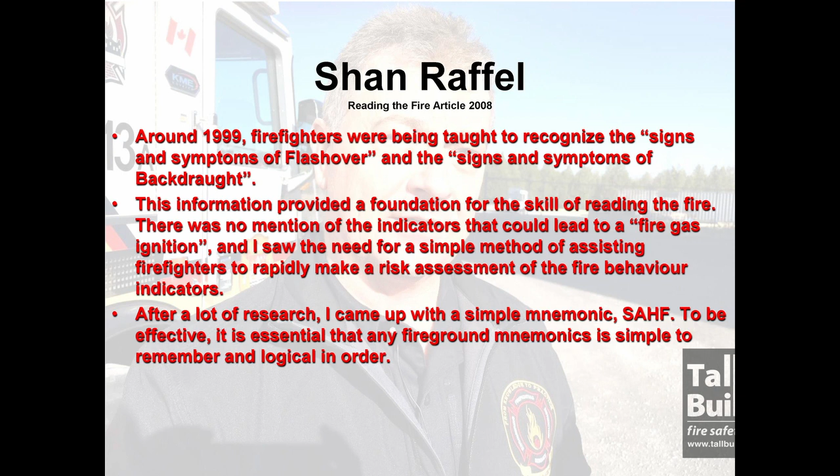Now, the SAHF concept—smoke, air, heat, flame—a guy by the name of Shan Raffel came up with this taxonomy. Smoke, air, heat, and flame. Brilliant idea, great taxonomy. Because historically, the fire service, when you ask them what the signs of flashover are, they would say rolling fire, high heat. Basically there was no taxonomy to the information. They had the information, but there was no taxonomy.

So it made it sometimes difficult to teach or to remember. So Shan came up with this idea, and we've used it and integrated it into what I refer to as the ventilation profile, what we see on the exterior of a building, and it's equated to building and environmental factors. The whole intent is to use this as part of your firefighter size-up and for strategic and tactical decision making. I'm going to review parts of that, not the whole model—there isn't enough time today, but I'll show you where you can get all of it.

The ventilation profile is a term I developed back in 2008. I heard the good doctor here, Reich, speak to the issue of ventilation profile—I disagree with his definition. There's the issue of ventilation, the terms we use: ventilation profile, ventilation state, underventilated. There's a whole bunch of terms associated with ventilation. So we looked at that in this program and said, you know what, this is what ventilation profile means. And that's been adopted by the National Fire Protection Association from our program.

I was on the 1700 technical committee for the guidance for structural firefighting, and that guide is based on science, looking at fire dynamics and trying to bring that into the fire service in a meaningful way.

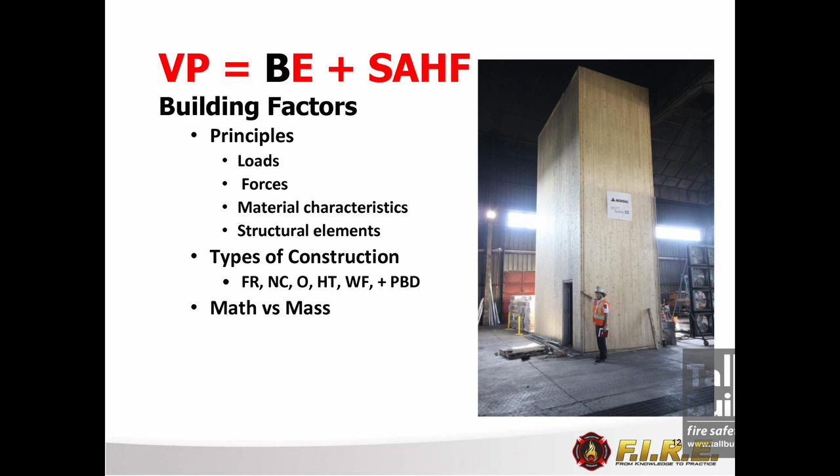That is a wooden elevator shaft being tested in Ottawa at the National Research Council. It could be a stair shaft—we're building wooden high-rises, that kind of stuff. And looking at math versus mass. So we explain those concepts to our firefighters as part of this model.

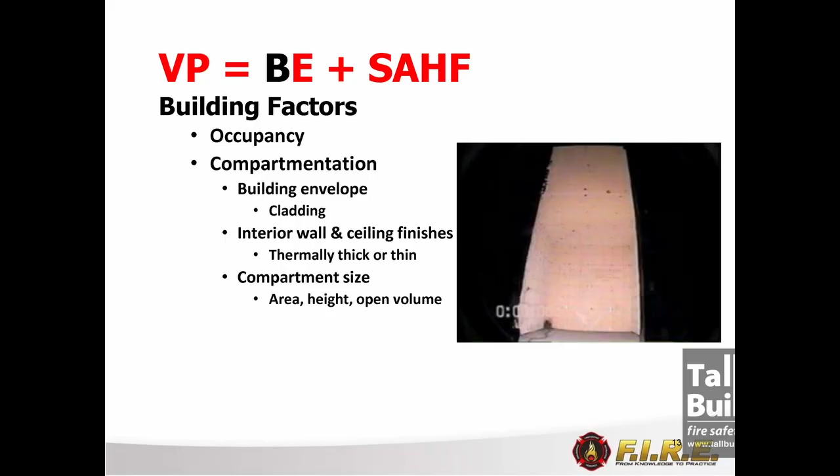So occupancy is also part of these building factors. Compartmentation—not only the cladding of the building envelope, but the interior finishes, as well as the compartment size. These are all important factors to consider when we're evaluating what we're seeing.

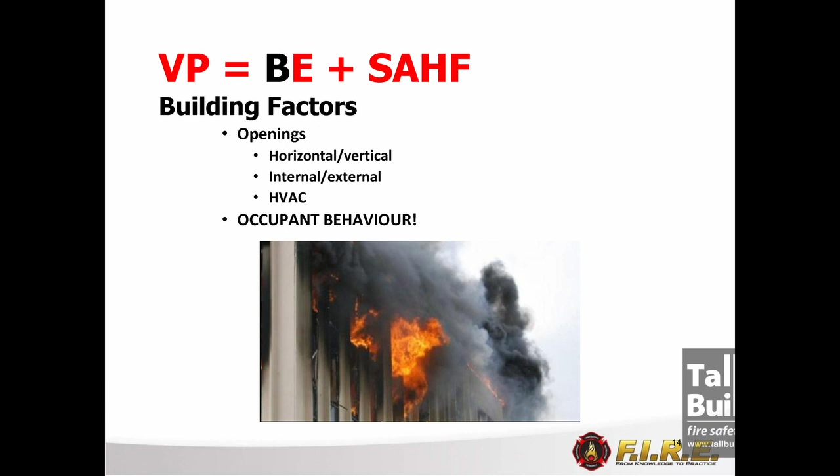Openings—there are a lot of openings in buildings, some designed, some undesigned. And occupant behavior also figures into building factors, like leaving doors open. We've heard from a number of people here speaking to how smoke is let to transit through buildings. It's not uncommon to have buildings universally heated from one source in Canada, the United States, and I'm sure here too, where effectively what happens is it's a nice day but they can't turn the heating down, so they open all the windows. So you have a whole different profile available to feed a fire.

So when we talk about fuels, again, these are building factors—their state. What state are the fuels in within this structure? Flashover is a benchmark.

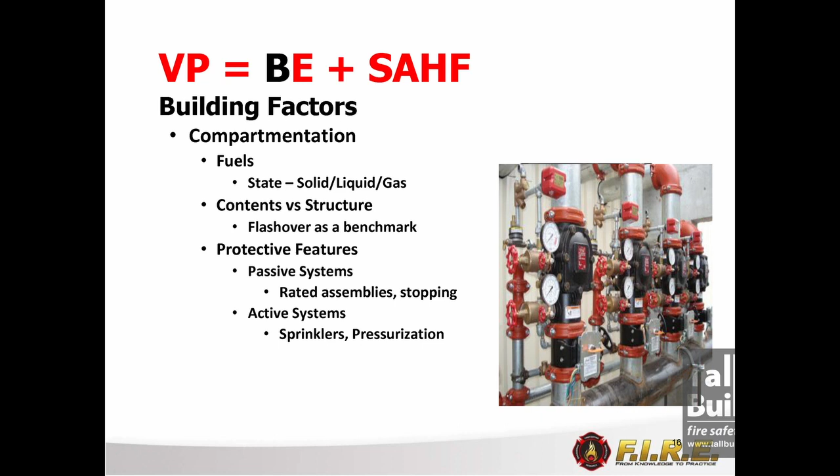Flashover as a benchmark means there's sufficient energy to degrade the protective finishes, which may start attacking the structure. So it goes back to those building factors, evaluating where that structure allows us to fight the fire over time, rated assemblies, compartmentation, and active systems such as sprinklers. These are all elements we evaluate.

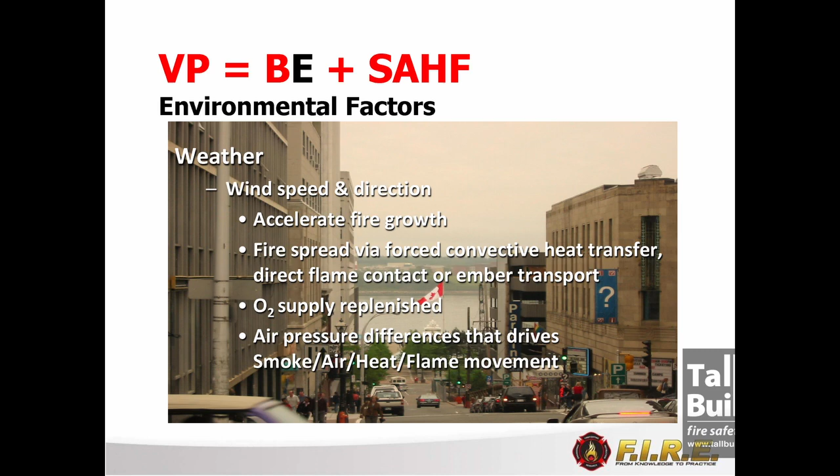Now into the environmental factors, the flag is key to what's going on, but it isn't the only way to evaluate for wind. You can listen at the doorways, see if there's a draft as you're opening buildings. There's a whole bunch of internal and external things you can do to figure out the wind.

Wind speed and direction creates a whole bunch of problems. It accelerates fire growth with unlimited oxygen, and there's forced convection of heat. No firefighter's PPE has ever been tested for convective heat transfer, only radiative heat transfer. So we're not even close to being able to manage this with the PPE we have, and that drives all the smoke, air, heat, and flame.

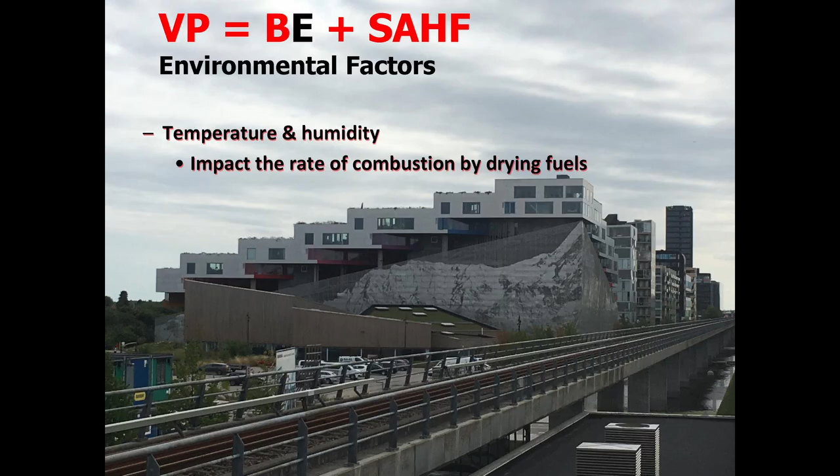Gerard talked about bushfires. Temperature and humidity have a huge impact if we're talking green walls and so on. Normally we'd discuss this in the wildland setting, but we also need to talk about it in the high-rise setting because of these green walls. Imagine this 14-story building in Copenhagen — that issue is real, especially with the wood backing all around it, front and back.

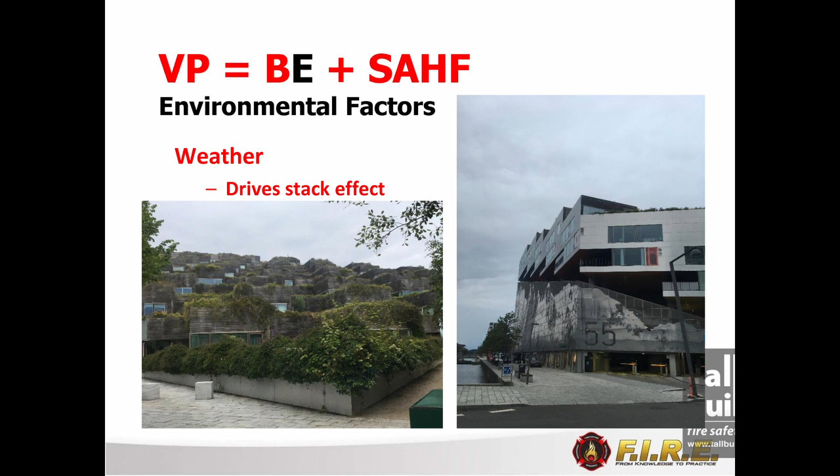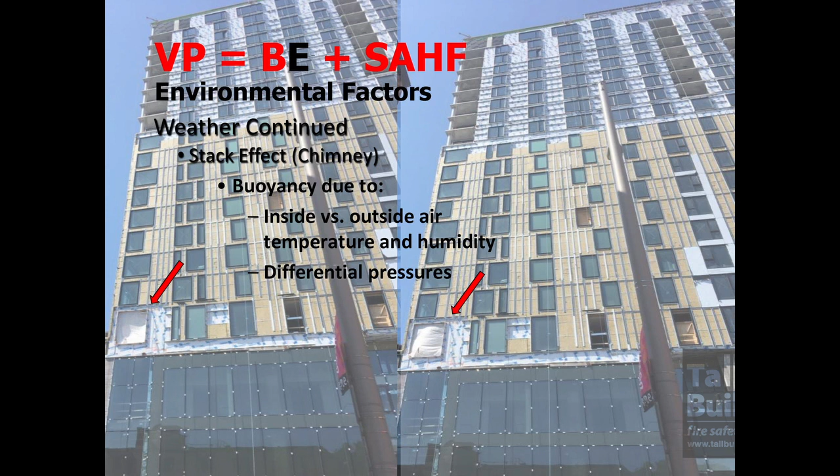That also drives stack effect. So not only are we dealing with the fuel issue on the exterior of the building, we're now dealing with the whole issue of stack, which drives buoyancy and the inside-outside air temperature differential, along with the temperature and humidity we spoke to, and the resulting differential pressures.

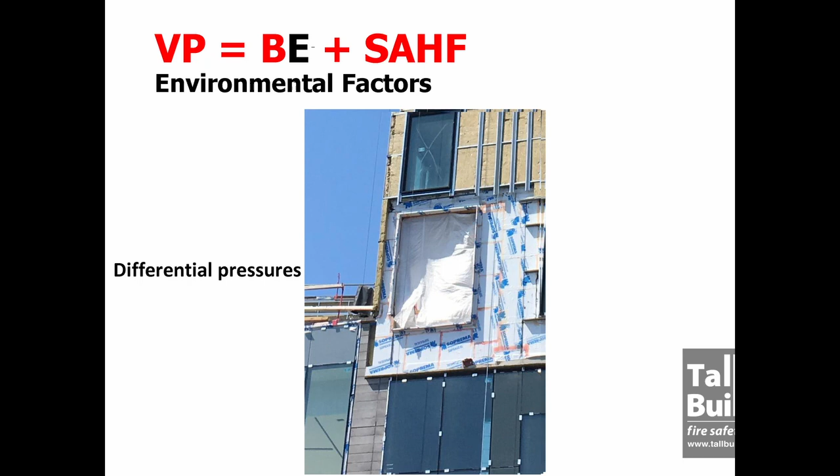You can see in this picture I took just before I got here, a tremendous change in the behavior of airflow within that structure — that chimney effect results in building leakage. That leakage moves through a number of areas within the structure, easily illustrated by a simple diagram. This is something firefighters deal with all the time in residential structures, figuring out where it's going and how it's moving. That becomes much more complex in a high-rise.

So when we look at stack effect, that significant stack effect creates almost the same forces, or better in some cases, as forced convection from wind. And it has led to fatalities.

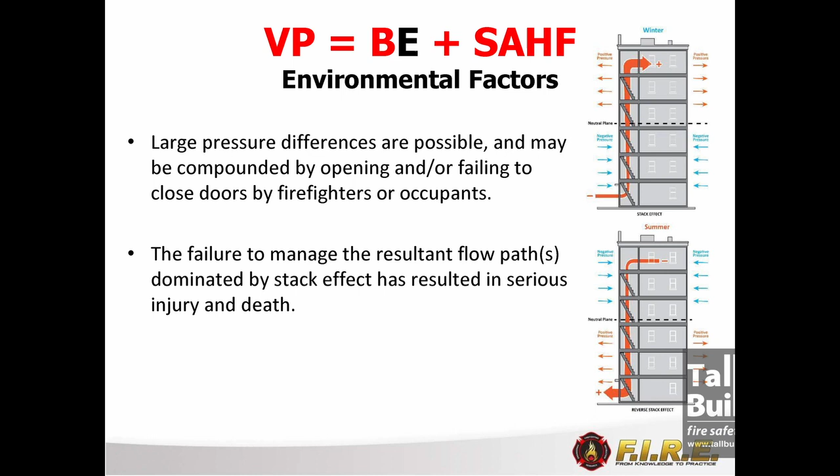We regularly use winter stack effect to our advantage to clear stairwells. Knowing that those large pressure differentials are available to us, serious injury and death have resulted — there are a number of fires throughout the world that resulted from failure to manage that flow path.

Weather in our jurisdiction changes what we see in terms of visible conditions. With less buoyancy, the color of the smoke changes because of the environment — it drops out the heavier particulate, or you may just see water vapor coming up through it.

Essentially the characteristics of what I'm seeing changes, and that's going to be really important when we're looking at the ventilation profile—understanding what impact the environment is having on what you're seeing. An example: a basement one floor below, storage lockers, it's got to travel a significant distance, so what we saw at the opening isn't the raging fire inside. And of course an inversion layer, it gets very cold, so you can have your smoke stay right on the ground. That's not uncommon in my jurisdiction.

That takes me to topography. We talked about that green space from the concept of fuels, but it's also associated with topography—the shape of the land or the buildings surrounding. When we look at those buildings, they all have an impact on how the wind will impact the structure, the aerodynamic effects associated with other buildings beside the one that's on fire.

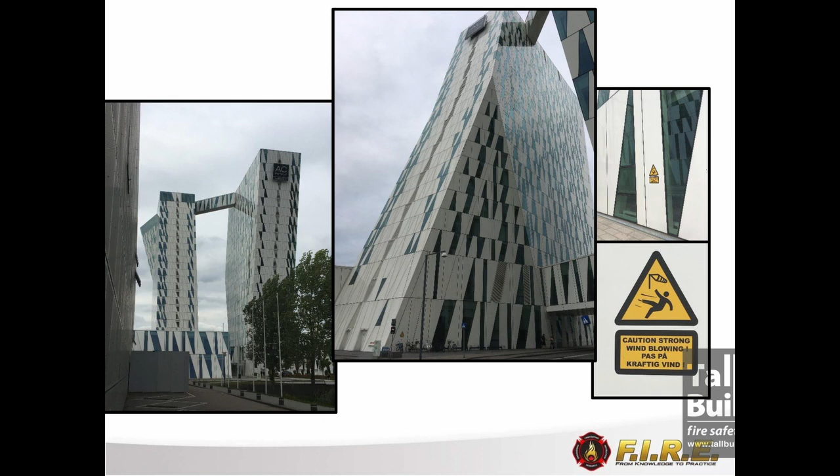It's amazing, right? And the hotel—Catherine and I were in Copenhagen doing presentations and we stayed in this hotel, and you notice the signs. There were these signs all around the building because of the shape of the building. So it's not only the shape of the land, it's the shape of the buildings. This building, by virtue of its weird shape, induces tremendous airflow around its base, making it unsafe to walk, so they have to put signs saying look out, it's dangerous here.

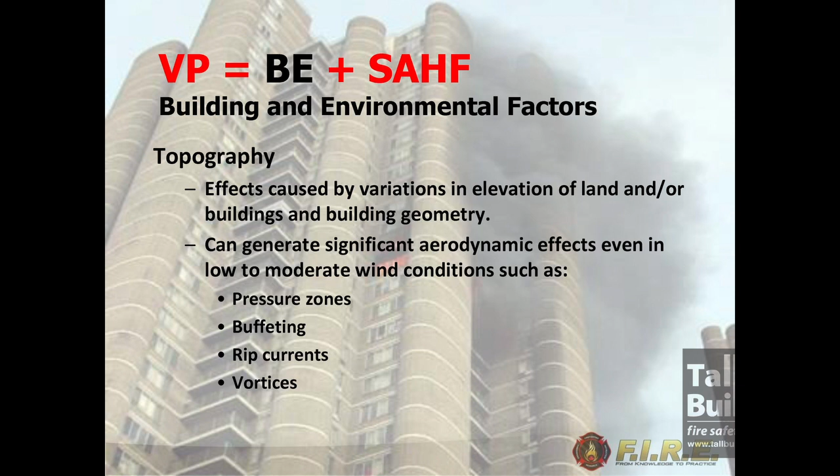Think about that. Building shape, as we just said, can generate a lot of different effects, related to variations in the elevations of the land and/or the buildings we've just looked at—building geometry, if you will. So those aerodynamic effects...

Typically might be looked at in things like aircraft—pressure zones, buffeting on the wing, all those things—but they're occurring in a rigid structure that now, if the windows are open or a flow path is created, creates very unique conditions, visualizations, ventilation profile ways.

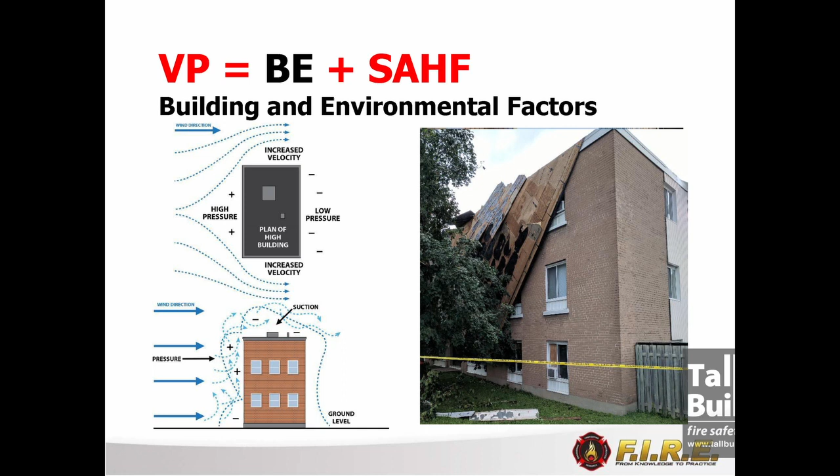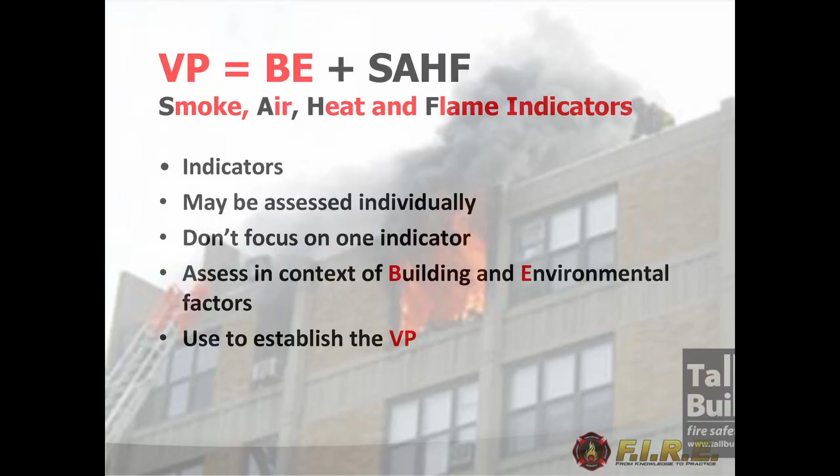So when we look at BE SAHF, we went through the ventilation profile, the building and environment elements: smoke, air, heat, and flame. They're indicators—like the dashboard on your car, engine oil, speed, temperature, all those things. That's basically the concept of smoke, air, heat, and flame. You can assess them individually; they can give you a lot of information, but you don't focus on one thing when you're driving. You want to look at the building and the environment in that context, and use it to establish the ventilation profile, because that's where we want to be—we want to know what that's telling us.

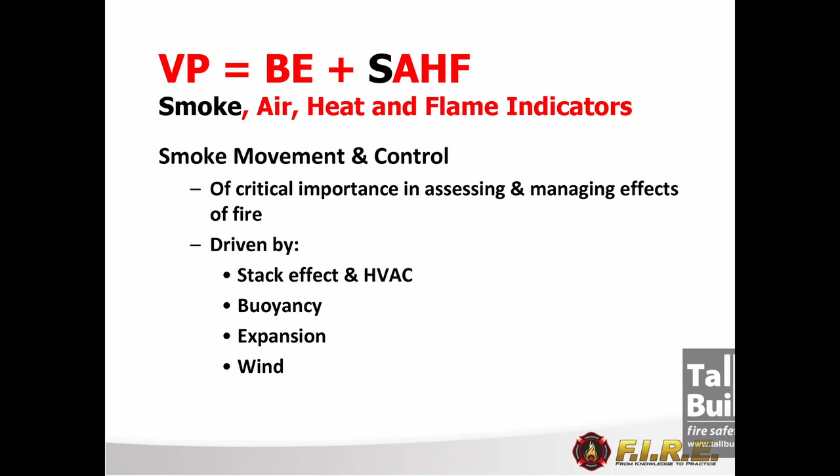So the whole idea of smoke movement and control is one of the big aspects we've talked about. Dr. Reich gave us—hey, we want to take care of that—and we know how it's being driven through the structure, and we need to manage those effects. When we want to evaluate smoke, we can look at its volume, its velocity, which is driven by temperature, its containment, how fast it's expanding, relative buoyancy. You can get a really small space but have a really high temperature, and it can push a lot of smoke.

And you're thinking you got a monster, so you got to look at that in the context of the structure. The density, in terms of its optical density, color - we can tell things about the quality

of the burning process by its color. Odd colors is the general rule in the fire service, called sneakers and binoculars - you got to be far enough away from it if it's green. If you got green smoke or pink smoke coming up, that's not good, right? So you get the idea. There's things you can discern, but the key thing is to look for changes.

And then we move on to air. When we talk about air, well, we can't see air, right? So what we do is contrast it with smoke. And it is the single most important factor in fire growth and decay.

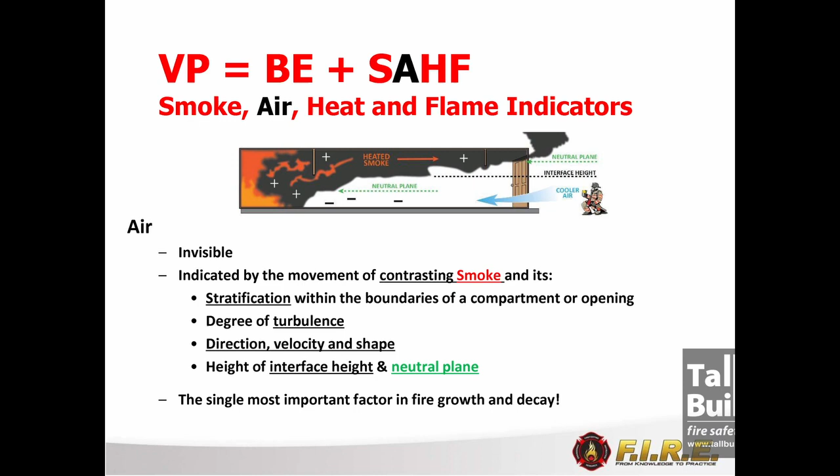But when we put those two things together, we end up with the smoke-air flow. And that layering function that we typically see, the smoke moving out, air coming in, is read together to quickly establish those three elements of the burning regime - the flow paths, as well as the ventilation profile, if you're looking at the whole show. Or typically what firefighters do is we look at that main compartment - we might see one or two windows or just one window, the vent profile, okay?

Now it's important to understand, we talked about models earlier - our understanding of flashover and the rules about flashover originate in the laboratory. It has a standard size opening, a standard area, and it has a bidirectional flow, okay? You got air moving in, fire coming out. So that's the model, okay?

So when we talk about that, it's a function of that gravity current, and that's just the density and the respective density of the air as smoke mass. And you got to understand that that can be disrupted by the wind or the combustion cycle.

Because again, we've been built to model. Remember, I was taught the signs and symptoms of flashover. I don't know, symptom? What's a symptom of flashover? I got burned - no, you know what I mean? The fact is that there was language used because we really didn't understand it, right? It wasn't the people teaching us.

And we got to understand that the general rule is, on average, it takes 30 years to get a Nobel Prize. And why does it take 30 years to get a Nobel Prize? Because it takes about 30 years for people to universally accept the information that was developed at that point in time, right?

And so if you think about it, they developed fire dynamics as a science in the 50s. Come the 80s, when I joined, they still hadn't figured it out, right? And so we were getting the information from the 50s and the 80s. And here I am in the 90s, and I'm going, how come you're still teaching them this stuff from the 50s? So that's the progression of the fire service in a lot of ways - it's advanced immensely since then.

But a lot of our information about how fire behaved really came from a laboratory, not real scale, full scale stuff, other than maybe experiential stuff, right?

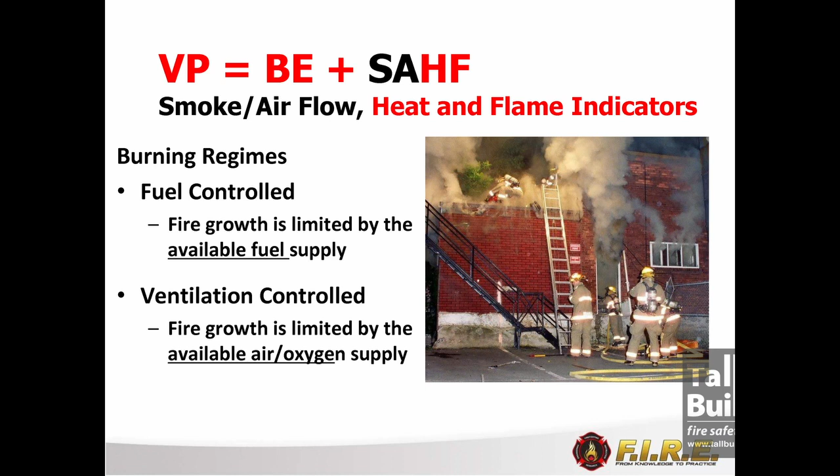So when we talk about the burning regime, historically, the whole idea of fuel controlled and ventilation controlled - that took us a long time to figure out, right? It really did. And it was a concept, because our buildings changed - they became more sealed and so on and so forth. It took us a while to get that one straight.

And that concept, again, it's a regime. And we like simple answers - it's either fuel controlled or it's ventilation controlled. Well, the reality is fires are somewhere in here, they're all over that map, right? And so knowing that and understanding where you are in the regime, its potential, is the idea of our flow path.

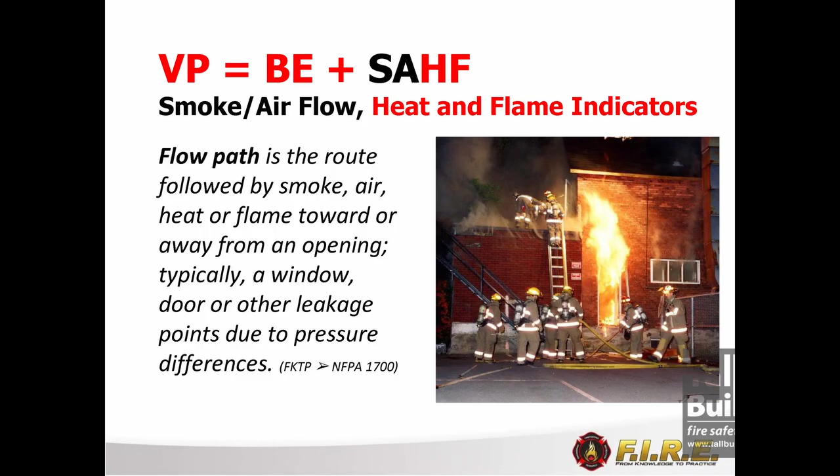Because again, looking at smoke-air, another definition that I wrote that basically became the definition adopted by NFPA in the 1700. And this is important because in some of the previous literature, they talk about a bidirectional flow path - it doesn't exist. A unidirectional flow path doesn't exist.

Okay, what exists is the flow path, and then the flow within the path. The path is not bidirectional, right? It's just a single route, and those flows move within that route. That's critical to understanding. And it's important to understand the flow characteristics, and they include that stratification that they taught us in the flashover model, right?

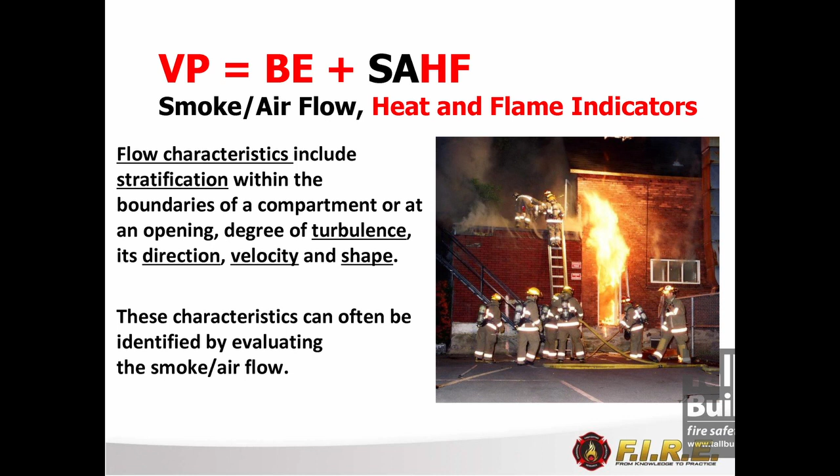As well as understanding the turbulence, its direction, its velocity, and shape. Shape is not something we talked a lot about, okay? And those characteristics are best identified by looking at that smoke air flow.

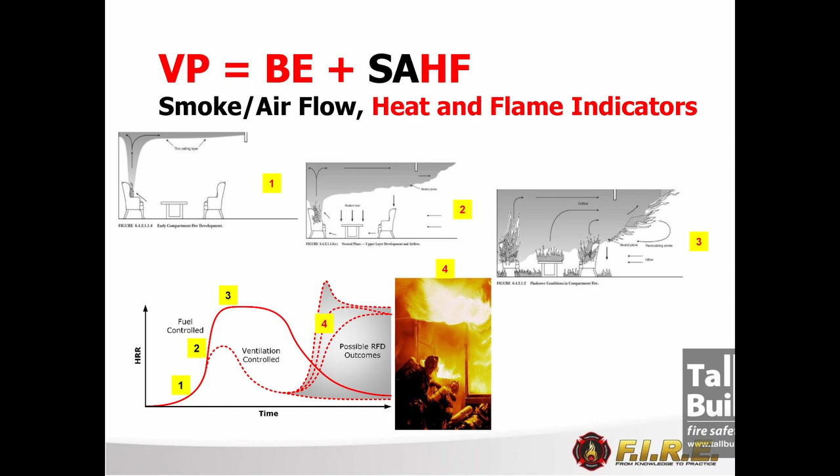So I'll go back to firefighter modeling 101. This is the one we got, the figures courtesy of NFPA 1700. So if I asked the firefighter, gave him the pencil and said, show me fire 1, they'd mark it on the graph, they'd understand that. Fire 2, it would go on the graph, that's where it would be. Fire 3, boom, we would have no problem with that. It's a model we know and understand and have been taught. Like I say, we had some trouble with that dotted line for a while, but I think we got that worked out and understand the potential, the energy release that's available when you get to number 4, okay?

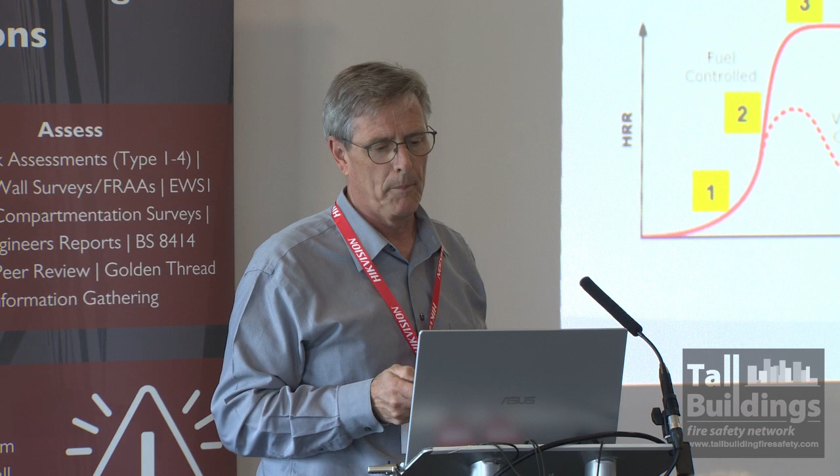And that concept was something that took us a while, okay? So when we look at the types of flows that are available, they can be classified as unidirectional flow, bidirectional flow, and dynamic flow, okay? So this again was introduced via FKTP, from knowledge to practice, into the standards, as a recharacterization of unidirectional, bidirectional, as well as the addition of dynamic flows.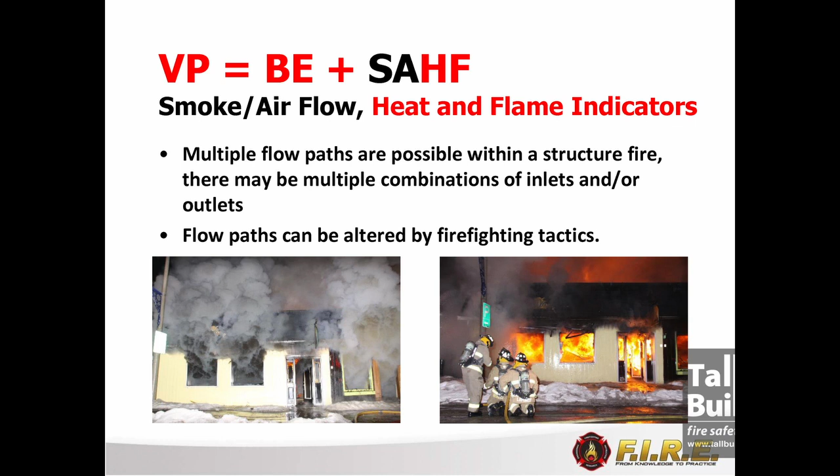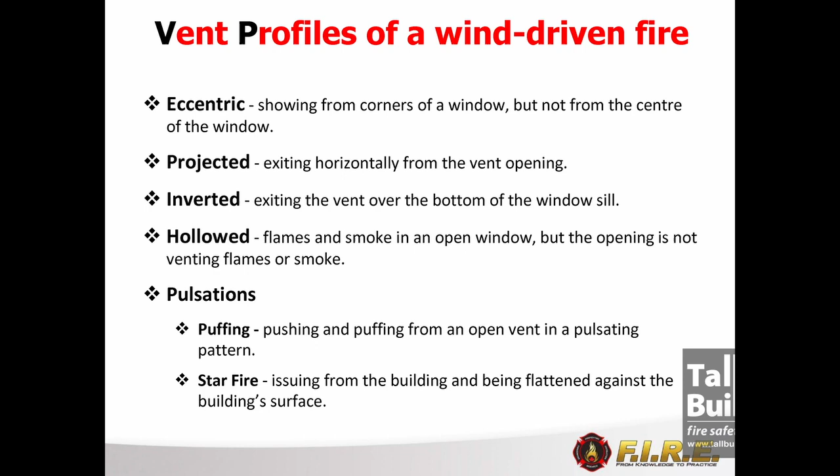And I think Michael handled this well already. You start messing around with things, you can make lots of flows in a building. It's possible, and firefighters can mess things up, okay? But essentially, the vent profiles that I want to make sure firefighters in the room understand at 2 o'clock in the morning when they look up at 20 stories and go, oh, I got a fire on the 20th floor, understand what that vent profile is telling you, okay? Because there's a lot of information, and if you understand the non-standard or atypical conditions, you won't put yourself on the wrong side of the shotgun.

And that's what we saw in the fire test. There was a fire called Vandalia in New York, and that fire in Vandalia killed 3 firefighters. It was a blowtorch down the hallway. And I'll tell you what happened. We had a monster fan on one side of the building and a monster fan at a doorway. And we were going to see if we could create a fire that moved really fast, and could we restrain it with a fan equally? Well, that was like day 5 or 4 of experiments.

So we really wanted people to understand what to see and what to look for. So I created these, if you will, nomenclature for the pictures I had taken, because I started seeing, from my role at the time, which was operational safety, to evaluate for hostile fire, structural failure, and firefighter physiological, kinesiological, and psychological effects. So this became sort of a little passion. And I noted some stuff.

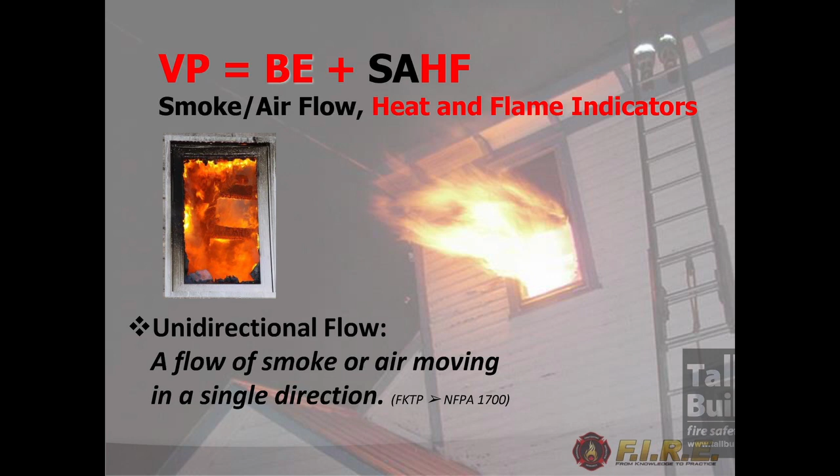And so unidirectional flow is a flow of smoke or air moving in a single direction, right? So if it's like that, you know that right away, there's got to be an inlet, there's got to be an outlet. There is something that's not a normal flow. It's atypical, right? Because normally smoke top, air bottom, is bidirectional.

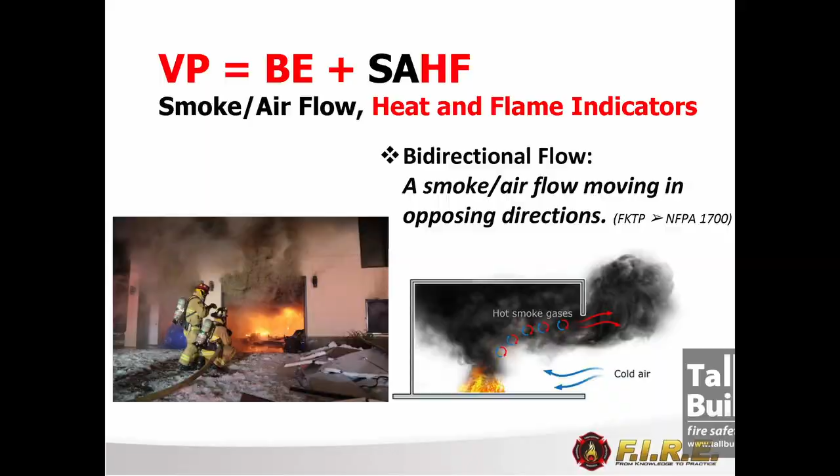Bidirectional, right? Pretty straightforward. Dynamic is a unidirectional or bidirectional flow of smoke or air that presents irregular stratification, okay? And a shape that alternates in direction, such as pulsations. So when we look at that, eccentric, it's pretty obvious. That's not normal. Air is acting on the opening, right?

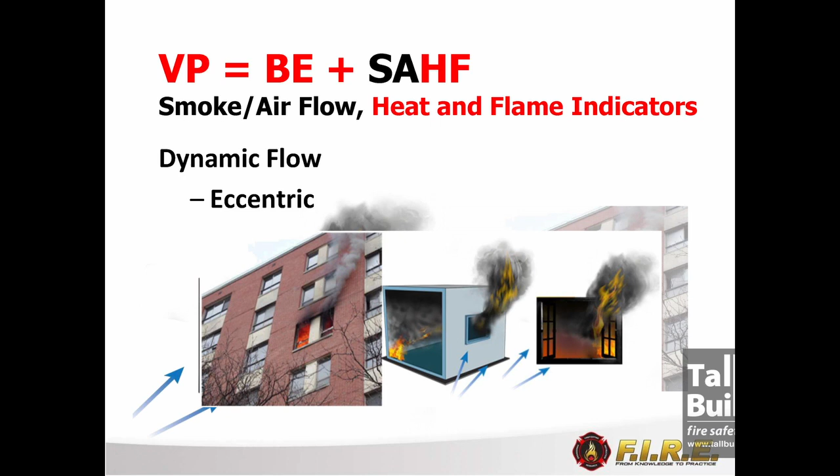And you can see, we built a couple of graphics. It doesn't have to be a closed box. There could be an open door there, right? This room could be so full of smoke and fire, and the wind's blowing that way, and we're getting that eccentric profile, but that door could be open, the air that's blowing down there. Or it could be a closed box, okay? And projected.

So again, this projection is when we failed the door. That whole instrument row on the 3rd floor disappeared. Lots of money, cameras and everything just kind of burned up. But again, the door, it shows it.

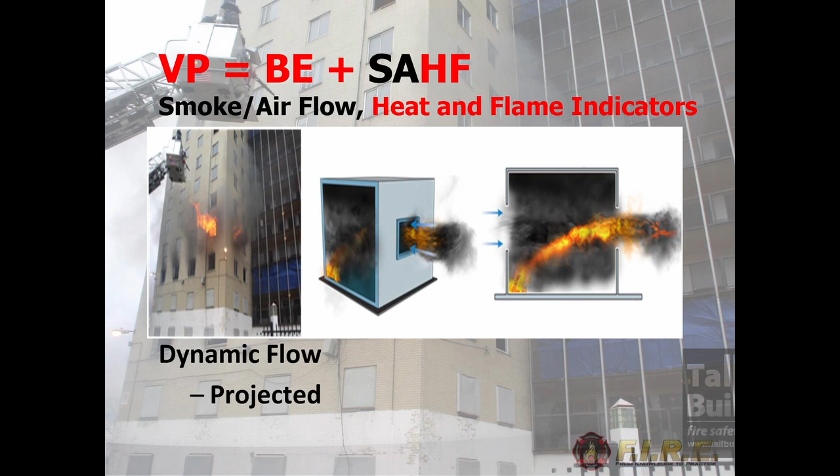Two models, if you will. It doesn't have to be open, okay? It depends on how the air enters into the opening. Now this is inverted projected. I don't have a pure inverted, but the fire or smoke is coming off the bottom of the sill, okay? And it just happens to be projected as well, right? You can see from this little graphic how that's possible, where the air enters the opening.

Conceptually, what you have to think about is a really tall building here and a less tall building here. The wind could be blowing this way, pushing air that way, and basically go in the top of the window, as one example, okay? And here's one that is inverted, eccentric, and projected.

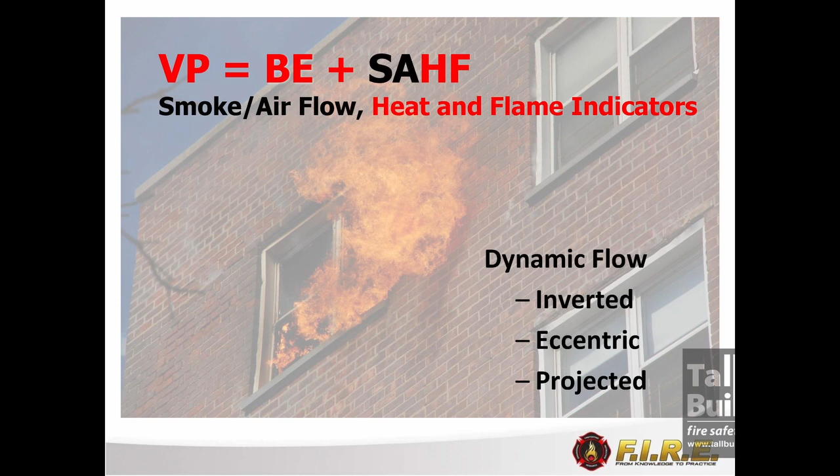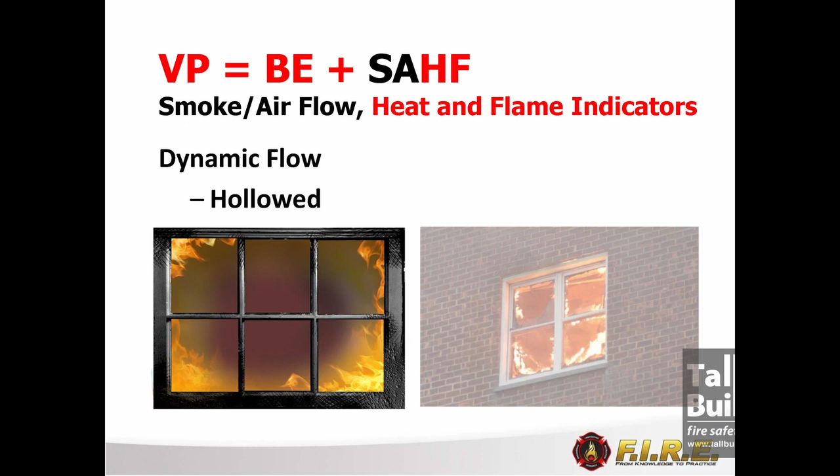Not normal, right? Atypical. Hollowed. So when it's just flames hanging at the opening, you might see a little flame, or you might not see any flame at the opening, just a glow inside. That's an inlet, right?

And then puffing as part of the dynamic flow. So Governor's Island typically has lots of wind when the experiments were planned to be run. I believe it was October. We had no wind, we had to use fans. The last day of the experiments, the wind came up. The wind produced effects that were far more deadly than a directed fan.

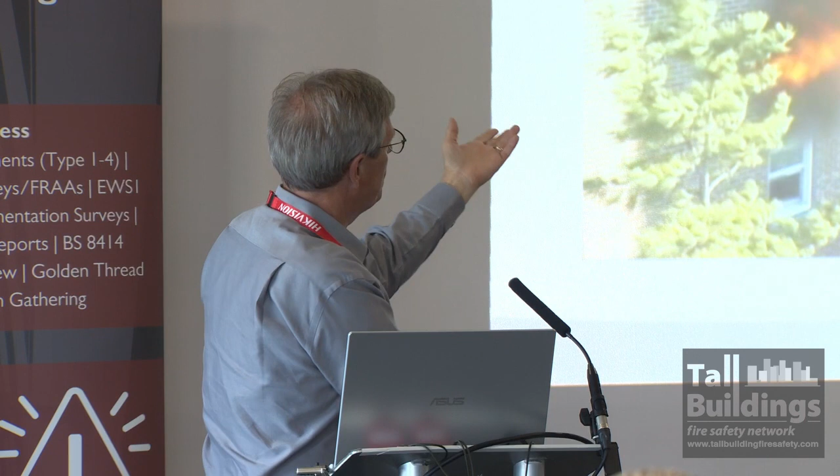Like much more violent, okay? And what you're seeing there is that mixing, the combustion cycle: air being pushed in at the eccentric, being consumed, fire grows, pushes back out, no air back there, collapses, in it comes again. So that's the combustion cycle. Right? So Puff the Magic Dragon, if you will.

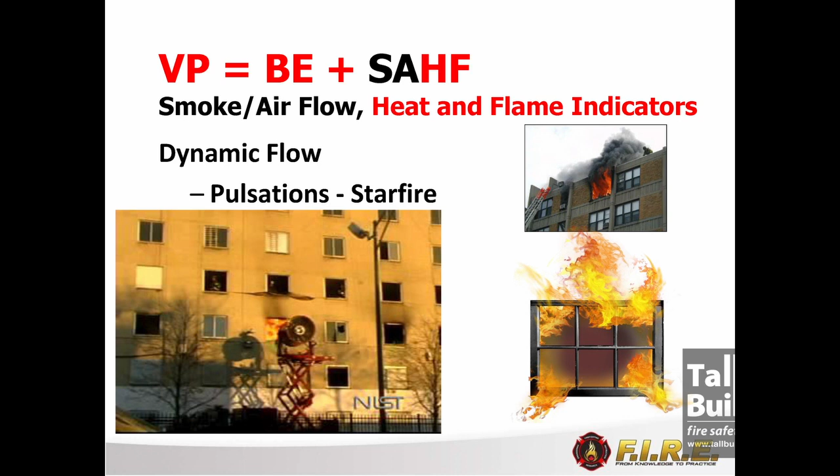And this was another one where we used the fan. This is where we had the door fail on the other side. So this one's referred to as starfire. You can see as the air is pumped in. Now appreciate that we've opened the door on the other side, right? That fire is blowing up stairwells as well.

But you see it comes out and it lays flat against the building, or some degree of. So it looks like a big star. Okay, there you go. Pretty mean fire, right?

And so there's actual videos of fires in France and stuff like that. You see some of these characteristics. You may not see them all the time. But the key is to understand why this is and how this works. You can see in that upper right, if the building had continued further up, you would have a bit of a hollow and you start to see some of that starfire. So again, hollow and starfire can be very much related, and that's related to this.

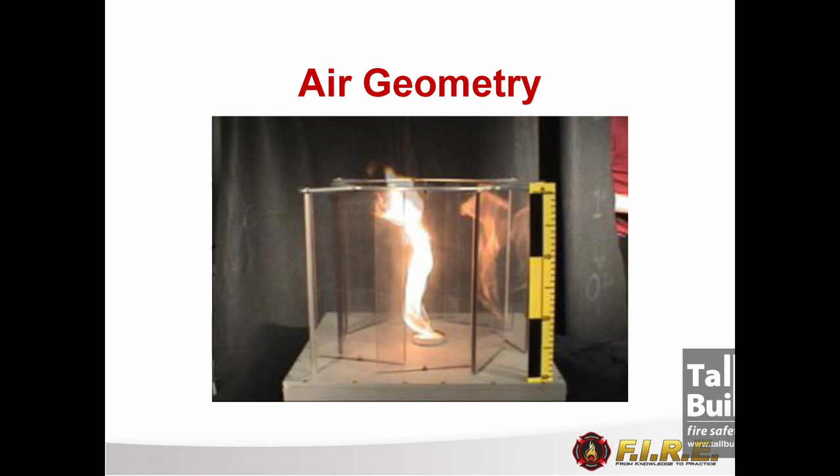We regularly speak to the issue in the fire service of fuel geometry, building geometry, but we never really talk about the geometry of the air interacting with the fuel. Unless, of course, you're into fast cars with modern day engines, where the whole idea of combustion efficiency comes into play. Essentially, what we have to understand is what is the angle of air striking the fuel? And that's essentially what's happening there - they change the angle, you get a better mix, less air, and that's what happens in wind-driven fires.

We get a better mixture in that fuel, and you have accelerated temperatures, you have convective heat, and it turns into a blowtorch - burn a door right off a building, into the hallway. Anybody in that hallway - Brent talks about the idea of door control. Critical in wind-impacted fires. So understanding and observing the difference, you can see that's an inlet. Well, that's an eccentric profile, vent profile, and I have over here a full, if you will, projected, all fire, not normal. Okay, so that should tell you that wind is impacting that.

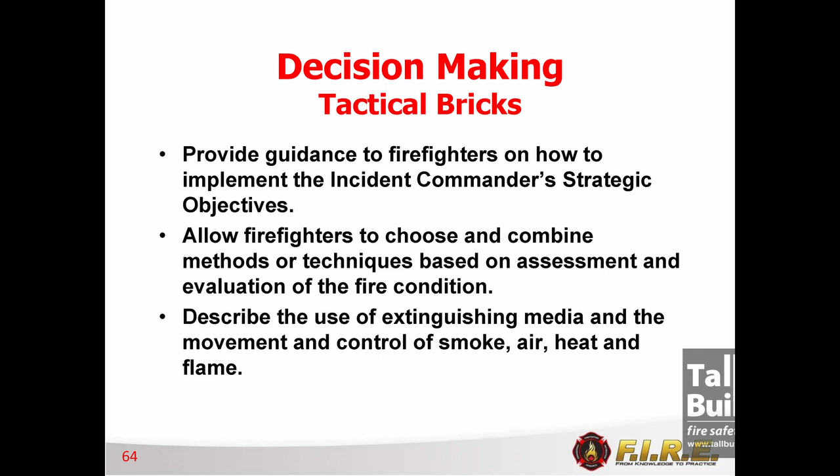So that takes me into another part of the fire dynamics program, and we modeled on Catherine Lamb's effective command. We took some of that modeling and in terms of the action steps of that model, we built tactical bricks. And this again was introduced to NFPA 1700. Everything you could do with water and everything you could do with air to fight a fire has been characterized in the tactical bricks. There are no other tactics. This is it, right? This is the whole gamut. But the intent was to describe these extinguishing media as it relates to air and water. So what we did was we described what does the commander want with the tactical objective? How does it work? What are the fire dynamics principles of that action?

Considerations for the company officer: what does the science tell us? What is UL? What is NRC? What is MSB? All the science agencies tell us the way or how we should do stuff.

Task level, as well as Plan B, and we talked a lot about Plan B yesterday, right? And safety considerations, keeping out of trouble.

Now, exterior control—some refer to it as transitional attack. We in Ottawa refer to it as exterior control. Transitional attack was, I think, a way to get around the idea of being defensive on the fire ground as opposed to being aggressively offensive. So it's just how you put the water in, right?

I'm going to give you a quick example of how this is written up. The whole tactical objective associated with exterior application of water is to improve occupant tenability and interior conditions for fire attack. And then how it works, that is associated with fire science—I won't read it, you can.

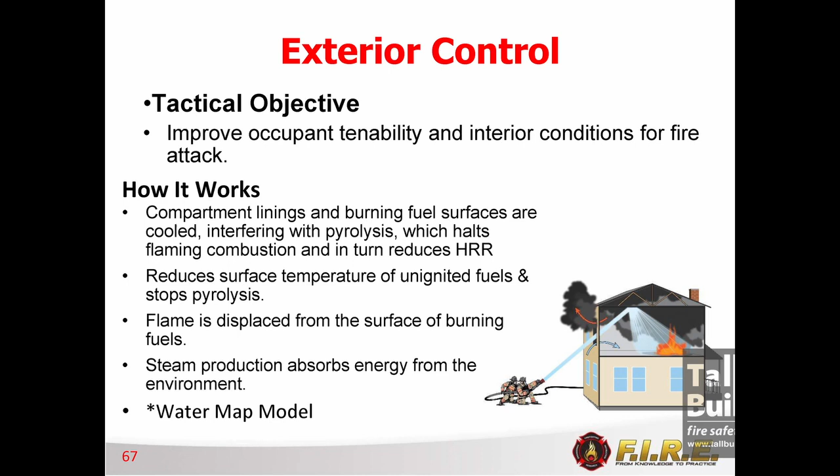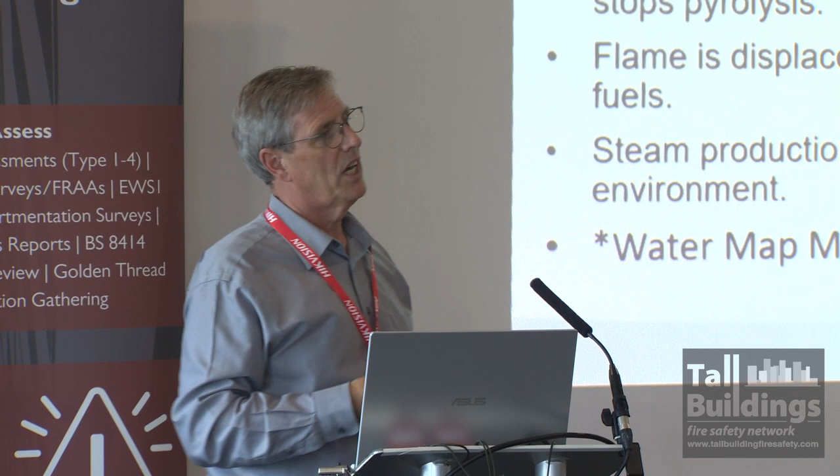And I think Brent really gave you a good understanding today, hitting the ceiling or hitting the doorway, how you can utilize large water to achieve your objective, right? To get the water in the right place.

So, example of exterior control, using elevating devices. And this was a wind-driven fire we had in downtown Ottawa about a year and a half, two years ago.

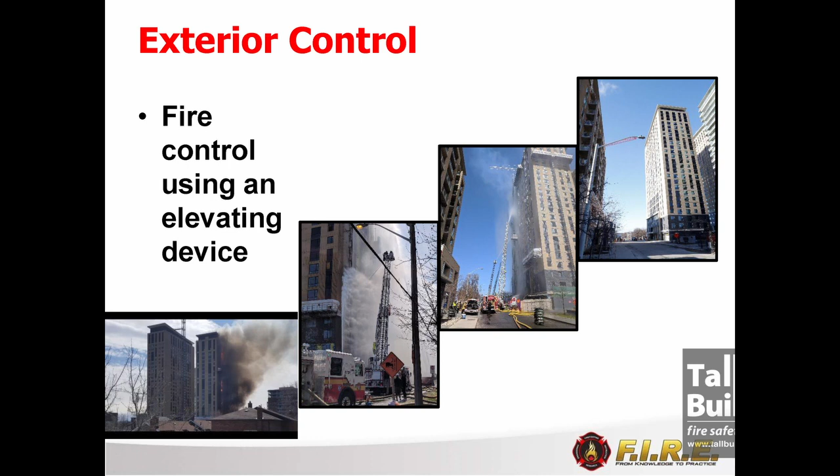Master streams, aerial devices, and then hooking up in a dry riser because it was under construction, and putting it out on the 21st floor and floors above, utilizing hand lines. So, and that's the building today—I took a picture the other day.

Flanking the fire—when we talk about flanking the fire, coming up through a stairwell, going into another apartment, breaking through walls if you have to, and get to that fire compartment, or from below, bring a line up from below, another floor, get into that other compartment, put your water in there.

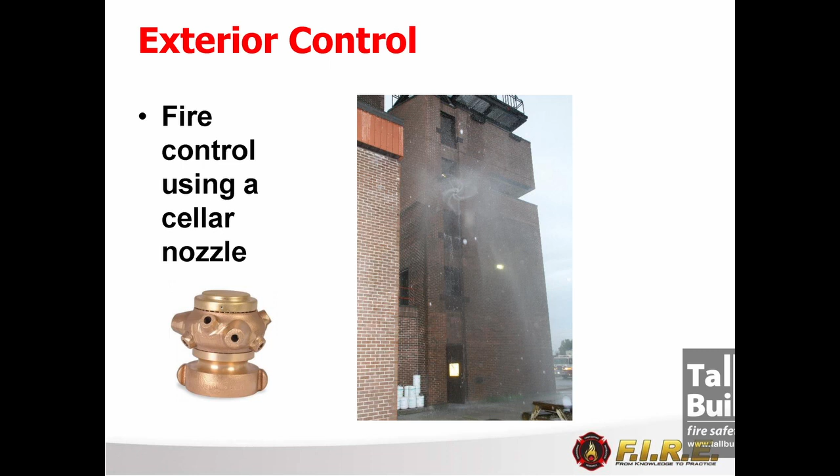Brent took this fire control using a cellar nozzle. He demonstrated that. We developed that technique in about 2008 in Ottawa, and then post-Wellesley I went to Toronto, and I'm proud to say Toronto was the first fire department in the world to put out a fire using a Bresnan rotary that I know of, exterior, using the Bresnan rotary technique that we developed in Ottawa. It's very effective.

The amount of water that is associated with that flow—I'm about 20 feet away from that opening, and I am soaked, right? That's just the Bresnan running outside, what I mean?

So we saw the curtain, the KO curtain. That takes a lot of staff to do that. We have also, if you will, the floor below. Brent went through that.

I guess the important thing here in concluding is we did that work in Governor's Island in 2008. In 2014, two firefighters in Boston were killed in the Back Bay—not a high rise. But you can see the conditions, and I don't believe they understood what they had in terms of the behaviors, right? So you could see that dynamic flow.

And understanding that dynamic flow, unfortunately, two Boston firefighters died in that fire. And firefighters are still dying because of wind-driven fires, and it's because they don't know those six basic forms to look for and understand the controls, right? That is critical, and a lot of that information is out there. Brent's done a phenomenal job bringing it into a very successful high-rise program.

So, in conclusion, that ventilation profile—what you see is critical, and there's a whole bunch of factors associated with it. It's a continuous assessment, right? Until you fully resolve the risk, and remember to evaluate that ventilation profile and be safe.

And if I conclude with these two Ottawa firefighters—one is holding a lamp and the other is holding a tool. It's the lamp of knowledge and good practice. And this symposium has demonstrated the need for making sure the knowledge and the practice get together, right? Thank you very much.